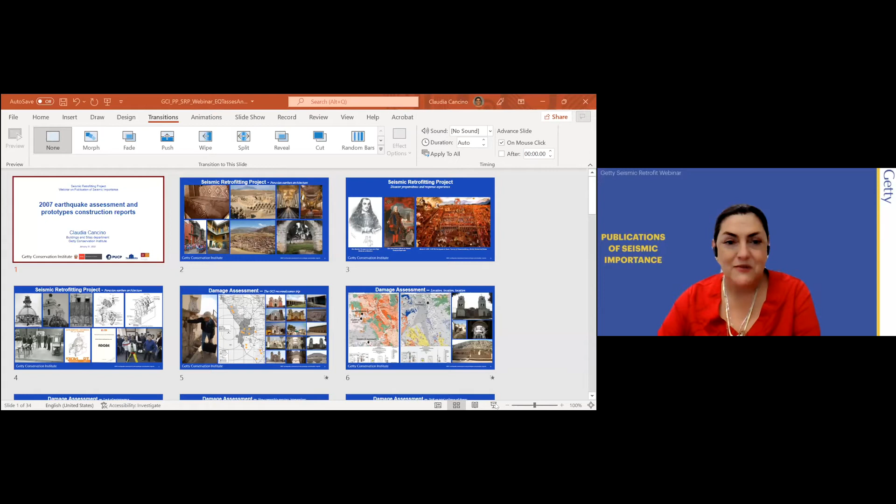Today, I am going to present the first 2 publications of the Seismic Retrofitting Project, the 2007 Earthquake Assessment Report, and the Prototype Construction reports. I also would like to acknowledge that apart from our wonderful partners, Ministerio de Cultura del Perú, Pontificia Universidad Católica del Perú, and TecMinho, the University of Bath and University College London collaborated with this project at the beginning in 2010 and 2012, respectively.

So you all have heard that I'm Peruvian, and probably you all know that Peru has a variety of earthen sites, starting from the pre-Hispanic period. And actually, in the last couple of years, researchers have discovered the oldest earthen architecture on the north coast of Peru, at the site of Los Morteros in the Chao Valley in La Libertad in Peru. The site was constructed with ancient earthen blocks carried from natural clay deposits by floods, probably caused by an early El Niño. And the bricks are dated around 3,000 years before our current era. So probably this is the oldest earthen architecture in the Americas.

But from there, Peru has developed amazing sites, starting with Huaca de la Luna and Huaca del Sol in Trujillo, as well as the site of Chan Chan. And then the use of this material didn't stop with the arrival of the Spaniards. The Spaniards actually adapted and improved the techniques to make them seismically resistant. And earthen architecture is something that is currently present in Peru and is used for the construction of modern houses. But I also would like to stop a little bit here in the history of Peruvian architecture to talk about these two very important fellows that you can see here on your slide.

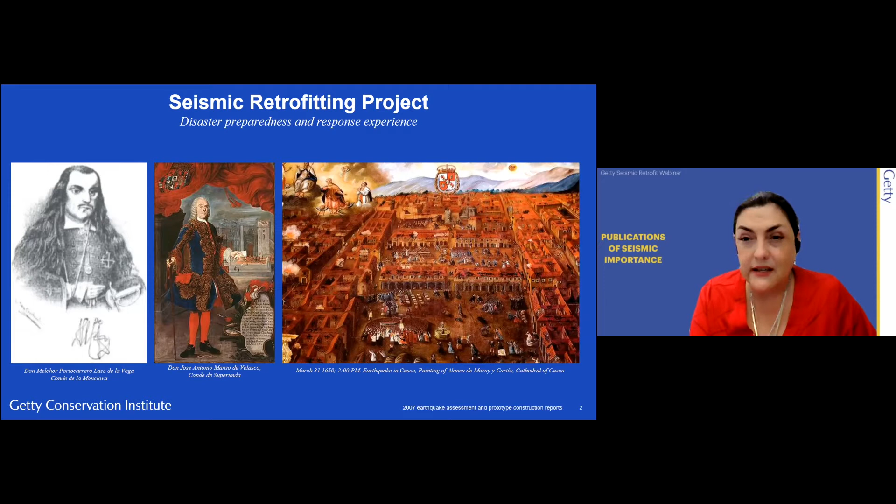So Peru is known not only for its rich and diverse earthen architecture, but also because of the evolution of the techniques to adapt to seismic events. This evolution during the Viceroyalty period didn't stop during the Republican period. And there were a lot of academics that actually study these techniques in schools of architecture and engineering. And particularly starting in the 70s, there were a group of engineers at Católica University, as well as the Universidad Nacional de Ingeniería, who actually started studying the use of earth as a building material.

So on August 15, 2007, around 6:40 p.m., a very strong earthquake occurred in Peru. The earthquake was described as having two strong motions and affected the sites of Lima, Ica, and Huancavelica, as well as parts of Ayacucho and Junín. Damages to vernacular architecture, concrete and masonry buildings were recorded there, as well as damages even in the Pan American Highway.

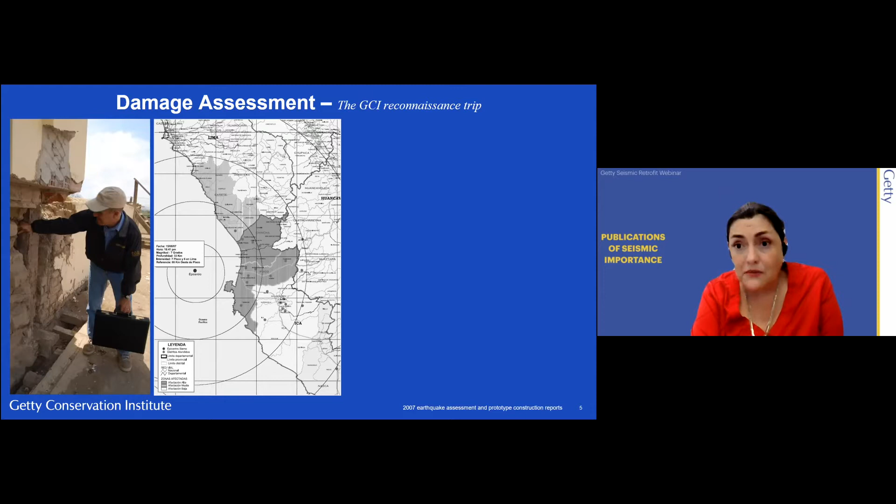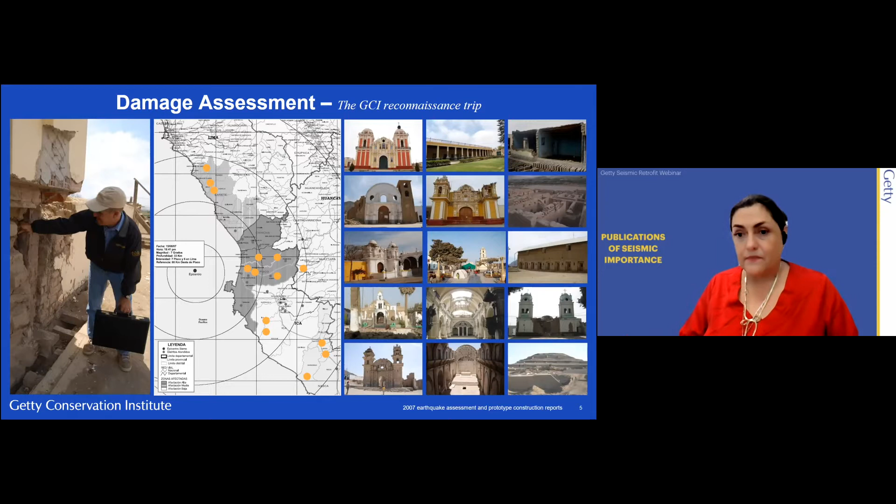Unfortunately, Peru also lost one of the most important buildings from the Viceroyalty period, that is the Church of La Compañía, that was built around 1650, and it was completely demolished a day after the earthquake. So when this happened, Getty was called by, at that time, the Instituto Nacional de Cultura del Perú to go to the site and evaluate the damage of some of the sites. And for us, it was actually an opportunity to understand why these buildings that over centuries have adapted and withstood earthquakes failed so terribly during this earthquake.

So after a visit that happened in November of 2007, composed of around 12 national and international experts, one of the conclusions was that location had a lot to do with how the buildings performed. So here we can see that, for example, the Church of Humay or the Church of Guadalupe are located over alluvial deposits that you can see here in gray, and those are not actually the best soils to withstand earthquakes. And similar happens with the Cathedral of Ica.

And just for your information, Tambo Colorado, an Inca site that has actually withstood a series of earthquakes, is located on a different type of soil. It's at the base of a rocky formation that you can see here in orange. So location had something to do with how the buildings performed.

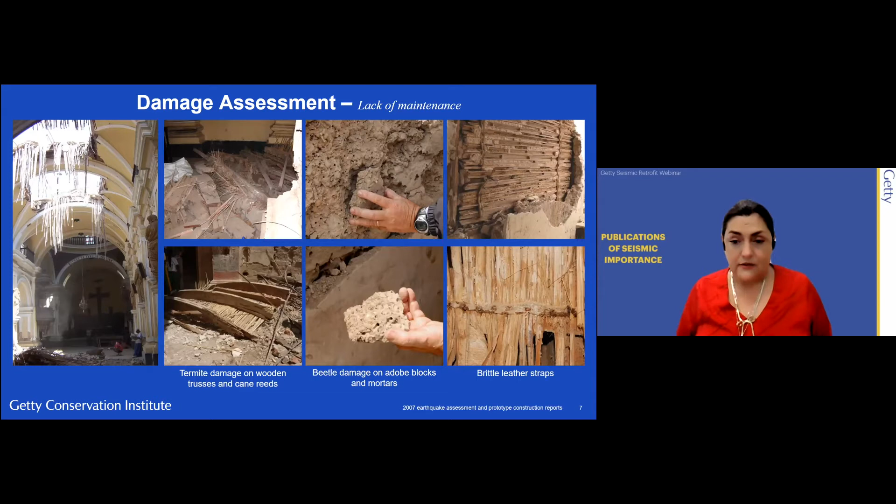Another conclusion was that for sure the buildings suffered from lack of maintenance. We were able to record termite damage on wooden trusses and cane reeds, particularly at the Cathedral of Ica, beetle damage on adobe blocks and mortars, as well as brittle leather straps, which actually connect the cane to the wooden structure and allow the mud plaster to be connected to the whole structure. So another conclusion from that visit was that there were a lot of non-compatible previous interventions.

The most common one is that the roofs of the churches, the vaults and the domes were actually in most of the cases covered with a layer of cement, probably to prevent rain entering the sites, and that actually increased the weight of the roof and had an impact on how these buildings behave during an earthquake.

In other cases, as you can see, they had interventions like these concrete porticos that were inserted into adobe walls. And of course, after the earthquake, the only thing that was standing was the concrete structure, and the historic adobe walls had failed due to the difference in pounding during the seismic event. So these types of interventions were the ones that created a lot of damage on the historic sites.

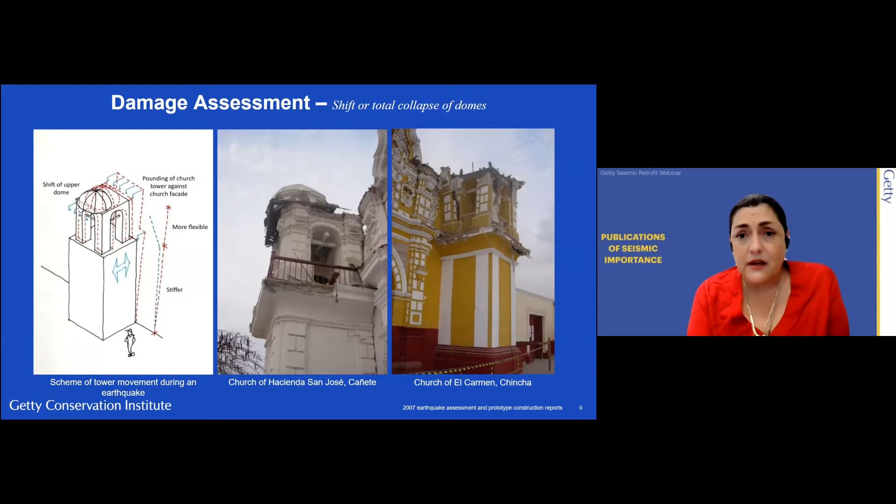We also tried to understand how certain elements behave during the earthquake. So we witnessed a shift or total collapse of domes. And that had to do with what we explained later, that the wooden connections were actually heavily deteriorated. That's the reason why a lot of these domes shift or collapse, as well as the vaults in many of these earthen sites. So it was a combination of the weight of the roof as well as the lack of functionality of the connections that created all this damage.

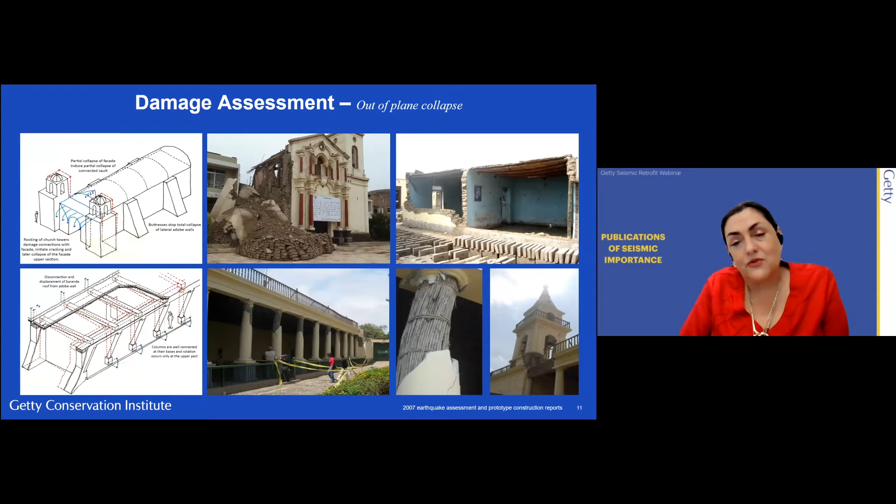We also witnessed a lot of out-of-plane collapse due to the lack of connections between the different structural elements, but we also witnessed a torsion effect here in one of these very interesting columns that you could see in one of the haciendas in the region. So all of this information was compiled thanks to some of the international experts that traveled with us. And this was the first publication from the seismic retrofitting project that you can now find in English and in Spanish at the Getty website.

So with this publication, we started the seismic retrofitting project that had the objective to design low-tech seismic retrofitting techniques using appropriate materials and local expertise for Peruvian historic buildings, prototypes that have the potential for wider implementation in the Americas. We wanted to test and model scientifically to demonstrate the validity of these techniques, obtain national recognition, develop a model implementation conservation project, and the final outcome, as Susan has mentioned, are the guidelines with an emphasis on maintenance programs.

So the first thing that we did was to define some sort of prototype that we could find in the region, and then from there, visit a series of sites and select the ones that were more appropriate. The 4 prototypes that we defined in the region were first, the typical residential house in the historic center that has the first floor made of adobe, and the second, and in some cases the third, made of quincha. The second typology was the typical ecclesiastical building from the coast that had thick adobe walls and vaults and domes made of quincha as the roof.

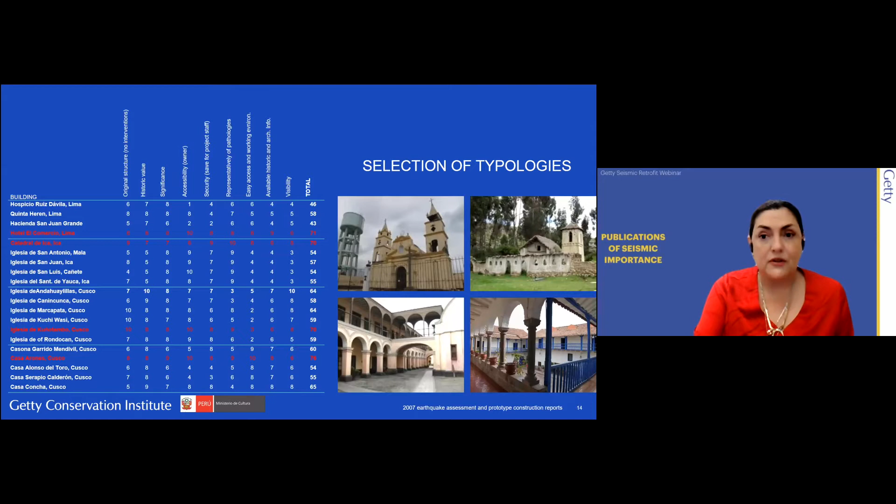So we visited a series of sites and we evaluated them according to historic value, significance, and whether they had interventions or not. And we came up with 4 buildings that became our building prototypes for further study. The first one, as a residential building from the coast, was Hotel Comercio in Lima, property of the Ministerio de Cultura del Perú. As an ecclesiastical building on the coast, we selected Ica Cathedral. As a residential building in the Andes, we selected Casa Arones. And as an ecclesiastical building in the Andes, we selected the Church of Santiago Apóstol de Kuñotambo.

So the Hotel Comercio is a building made of thick adobe walls on the first floor with some brick around the openings, and then quincha structure on the second and third floors. It has 2 patios, as any of the casonas that you can find in the historic center of Lima. We went through all the development of the architectural drawings, and we selected some areas for further exploration. We were also able to perform a structural assessment of the site, and also use the thermal camera to, for example, in this case, identify the wooden posts of the quincha elements.

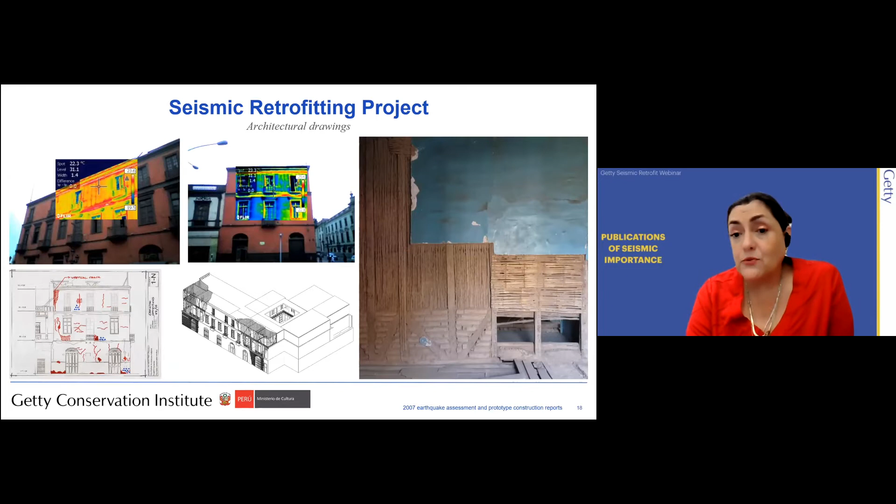All this research allowed us to create a series of architectural drawings and details that help us to understand how these buildings were put together and help the engineers to later design the proper testing and modeling.

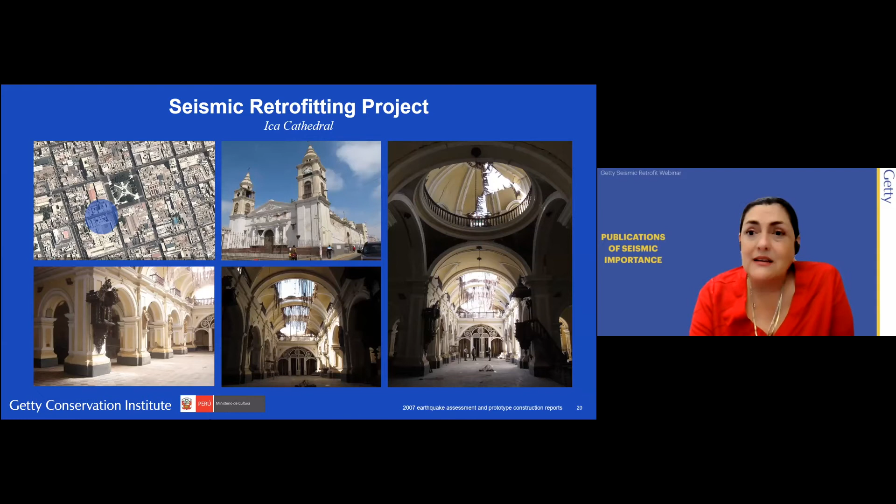Ica Cathedral was one of the sites that was heavily damaged by the earthquake. It's also located at the historic center of Ica, more or less in front of the main plaza. It unfortunately suffered from partial collapse of the vault. This photo of the dome was taken a few months after the earthquake, and you can see the dome is still in place, but there was another seismic event in 2009, and that was when the dome fully collapsed.

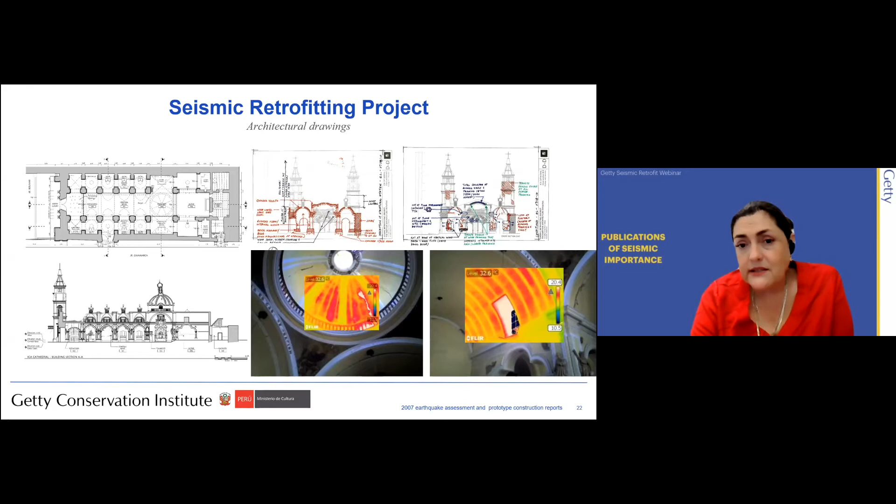So for the Ica Cathedral, we also did all the architectural drawings, the structural evaluation, and the proper prospection. We also used the thermal camera to understand the location of the wooden arches, as well as to try to understand the level of deterioration. It also allows us to understand how these amazing wooden structures were put together.

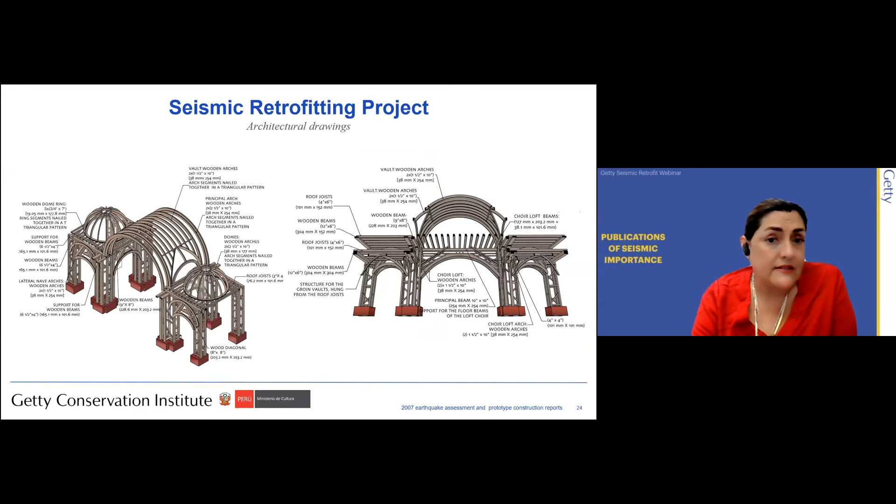We also discovered that Ica Cathedral has a very similar construction technique to the Cathedral of Lima, which makes it even more significant. So we were able to understand the details and the dimensions of this structure that later served for the analysis that the engineers are going to explain later.

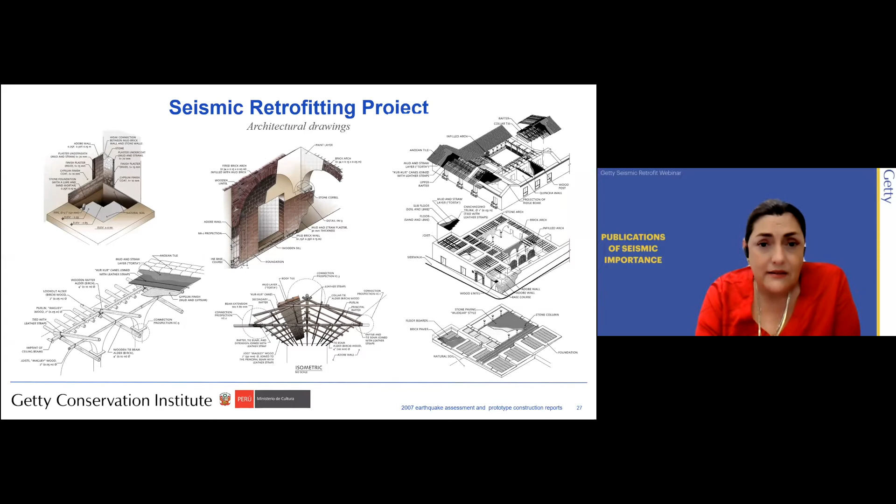We also selected Casa Arones at the historic center of Cusco. This is a typical house of the Andes, a two-story adobe building with a truss roof. We also did all the architectural drawings and the structural analysis of the house, and we were able to understand all the details of how these typical residential buildings were put together.

And last but not least, we also studied the Church of Kuñotambo, two hours southeast of the city of Cusco. It's a building from the 17th century, with thick adobe walls with buttresses, and has wall paintings from the same period. We did all the structural drawings and the details of this structure. And we particularly selected it because it has wall paintings.

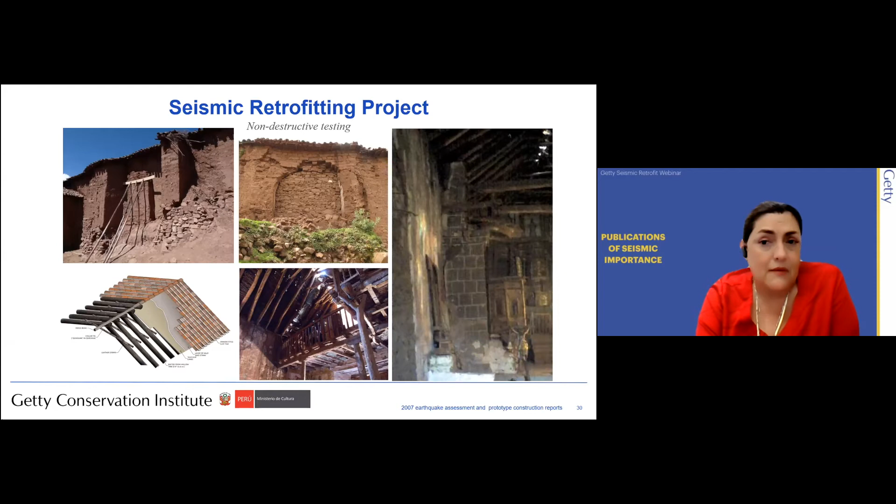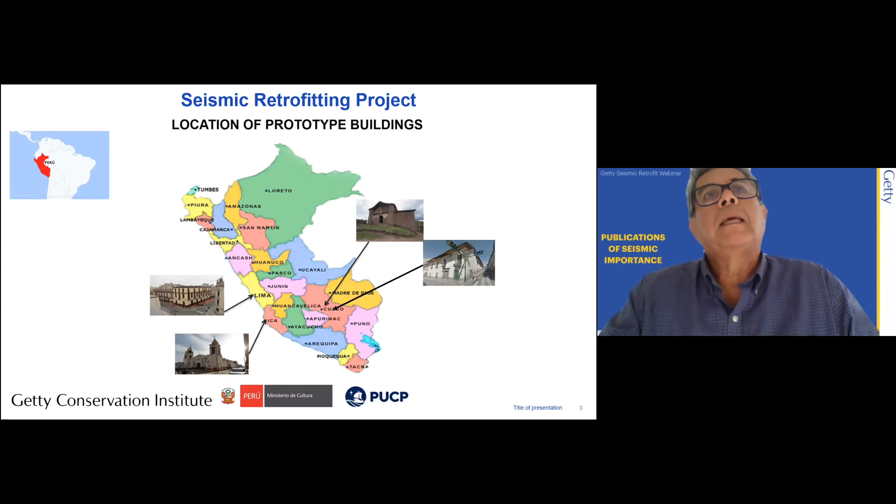The objective of the laboratory testing is basically to provide information for the analysis coming out of the meetings between the evaluations, the structural evaluation and the numerical analysis of the prototypes. We were in charge of doing the testing that came out of these meetings. There were a lot of questions about the properties of the historic materials of these prototypes, the structural behavior of quincha that was already mentioned, and the behavior of the traditional wood reinforcing techniques, like in the Ica Cathedral, for example, and whether the traditional retrofitting techniques that were applied back then in the constructions of the coastal area and the Andes.

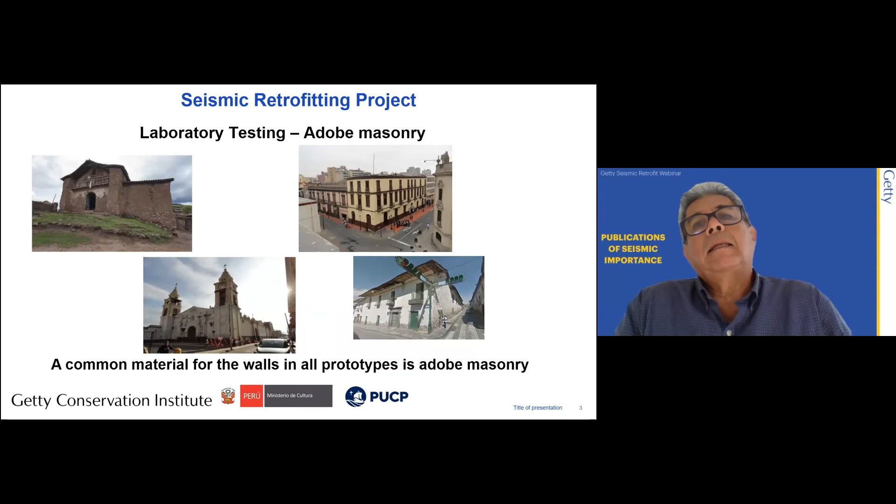So the first thing was that all of these prototypes, all these buildings have a common denominator: all the walls are made from adobe masonry. So we had to analyze all the materials that are composed of this historical component.

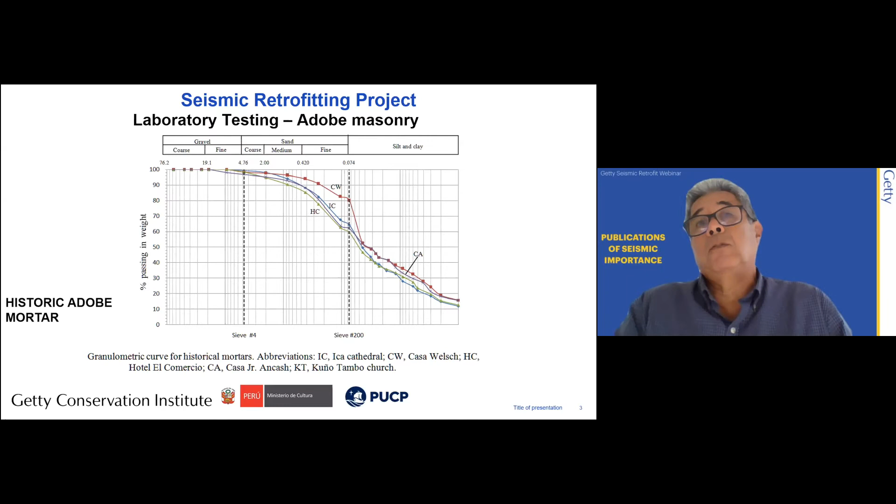What we were able to do is the seismic retrofitting project for all these prototype buildings. As you know, there are differences between the composition of the soil fabricated or built by different prototypes. However, when you see the mortar from these same buildings, the dispersion is not as large, it's much closer. This tells us something about this constructive process.

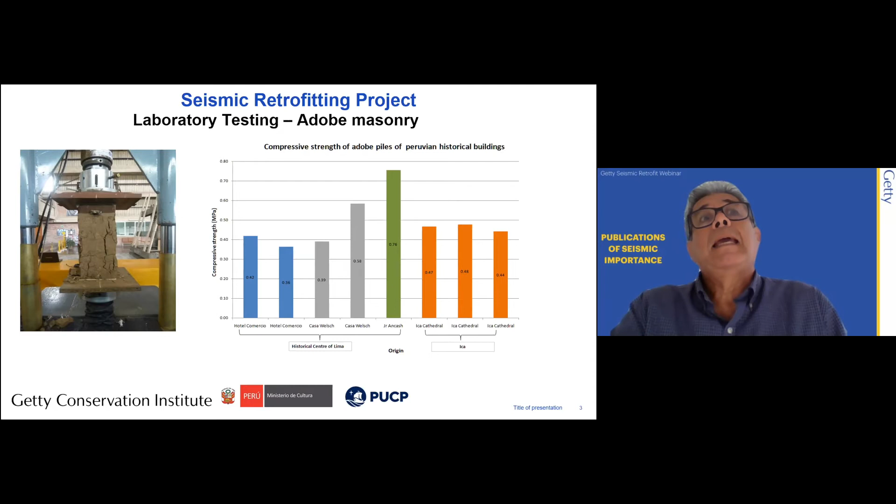So in all these prototypes, there wasn't just masonry walls of adobe, but it was also mixed with masonry from stone and brick. So what happens when you have a mix between one or the other? How would that work? But there is something that was common in all these cases.

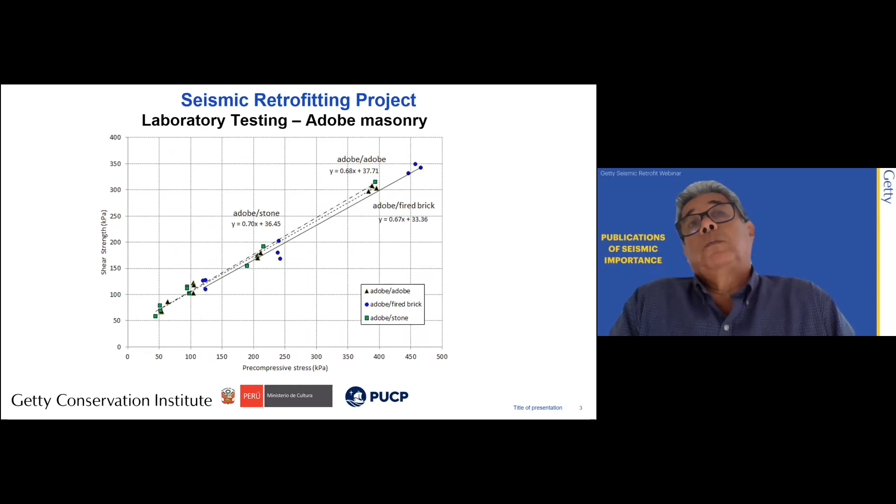The mortar was made of soil, and these compressions were made mixed with brick, but you have to understand this is all made with soil mortar. We were able to do this with adobe for the Cathedral. As you can see, there's not really a difference between the contemporary adobe, which has a bit more resistance, and the historical one. Nevertheless, when we mix the materials—adobe with stone, adobe with adobe, and fired brick—basically the results are the same, as you see in this graph.

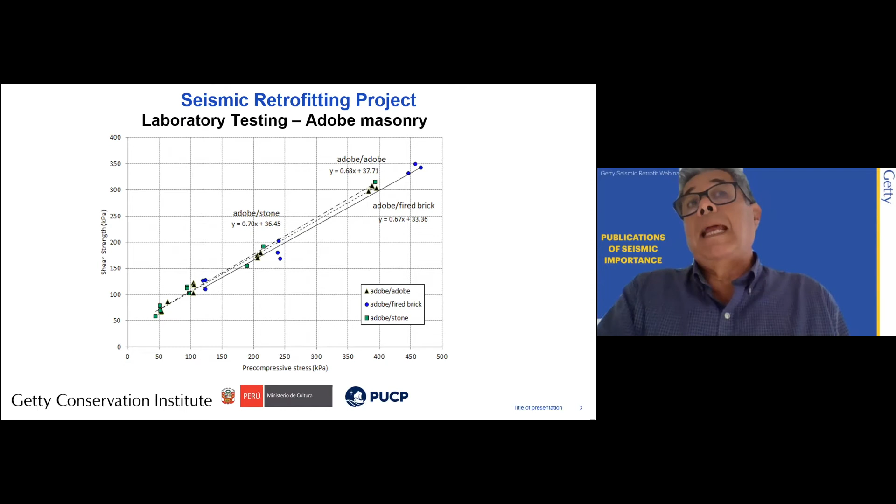Why? Because of the mortar. The mortar is a soil mortar in all the cases. And if you look at the friction, the internal friction angle, you don't really see any significant differences. So these are the conclusions I had already mentioned before.

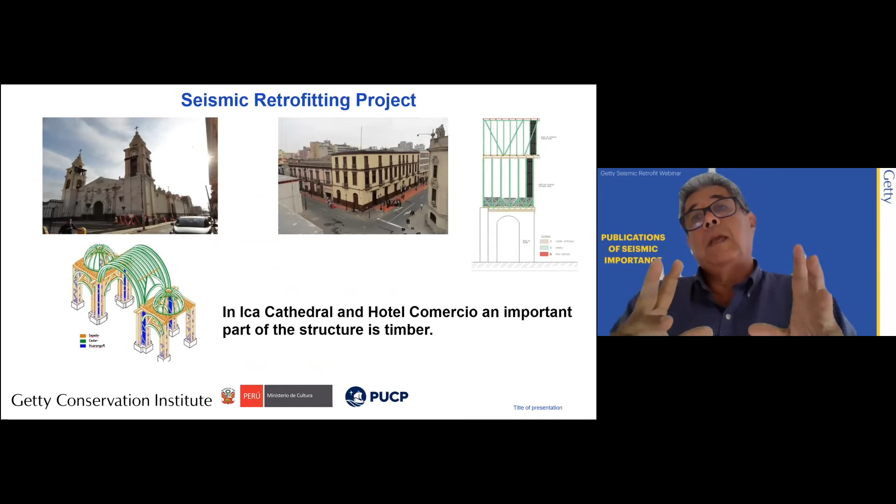In the Ica Cathedral and the Hotel Comercio, one of the important materials is timber. So we also had to analyze the timber material, but something particular in Peru: there is timber in the Amazonian parts, but not on the coast, and the timber from the highlands is different. There wasn't much timber available when these buildings were constructed.

So where does the timber come from? For all these historic buildings built in Lima, it came from Central America, by boat to the coasts of Peru.

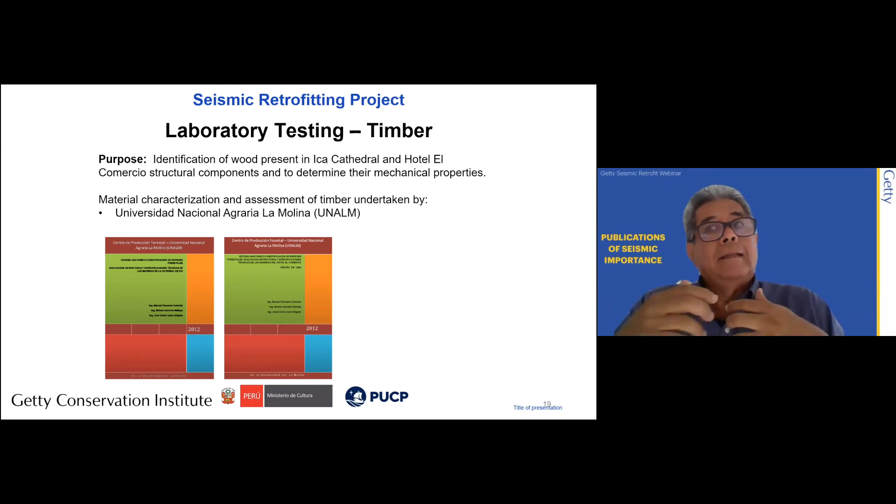And amazingly, it was a type of timber that they were assured comes from Africa. I don't know how that could have been the case, because we tried to look at historical information, but there was no historical information that convinced us that it could have come from Africa. So now we already know the values of the mechanical properties of all those types of timber.

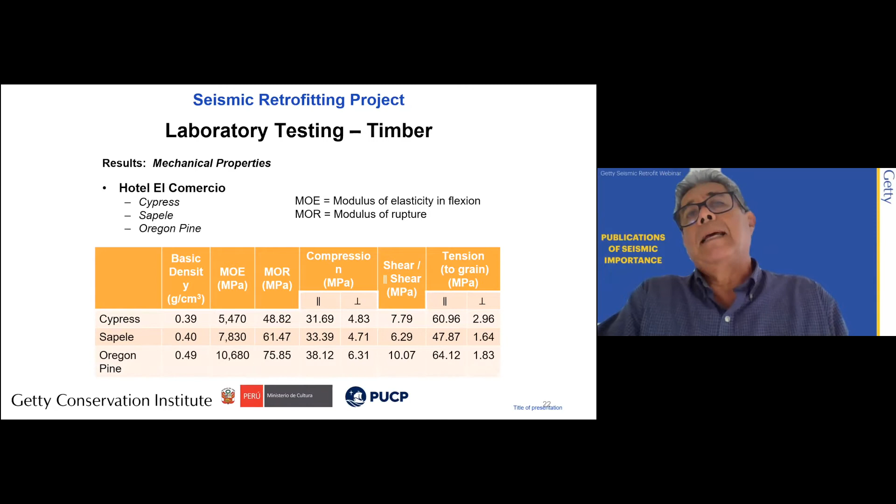That is to verify later on the numeric analysis that we had to do in this case. So in the case of the Hotel Comercio, we see the structural system of the quincha. And if we already know, and everybody accepts that the quincha is very flexible, very resistant seismically, there wasn't anything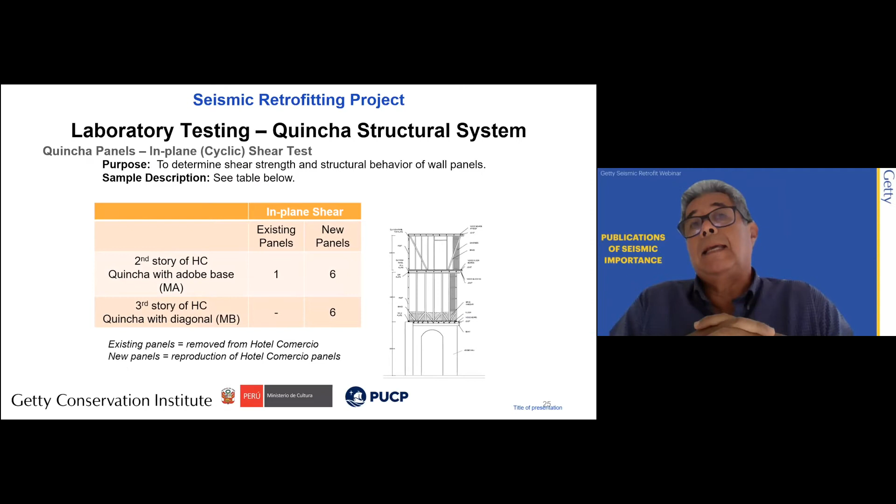numerical information that would corroborate this. So what we did was we had these tests in two different panels of quincha that would represent the panel of the second floor and third floor, right? The third story, as you could see to the right there. And it was reproduced exactly the same dimensions of the same timber and the same type of procedure throughout.

So these new panels were reproduced, and the difference between the second and the third has a diagonal beam, but the first one has an adobe base in the bottom. It was an adobe base for the second and a diagonal one for the third.

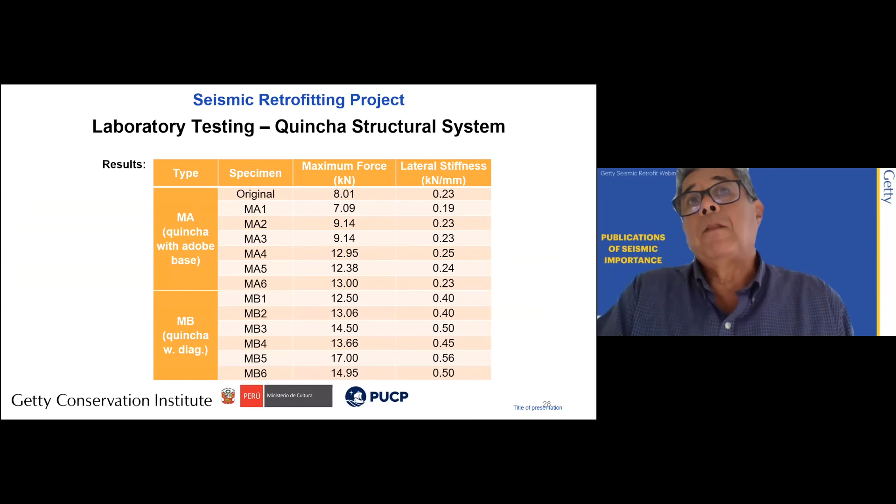And we were able to test with these vertical loads and without vertical loads. And what we could see here, in the case of the maximum force, the horizontal maximal force in both cases, it was like around 12, 13, 14 kilonewtons of maximum force. But the most important thing is not the resistance itself, but the capacity of deformation.

And what we can see is the capacity to resist vertical loads. It's very, very acceptable.

And these are the other panels that you could see, but this is a new type of timber. The timber is 200 years old or more. How could it be? And then after thinking about what we could make, this testing of the

existing quincha, we were able to take off the wall in an area where it had collapsed and rebuild it element by element in a structural lab.

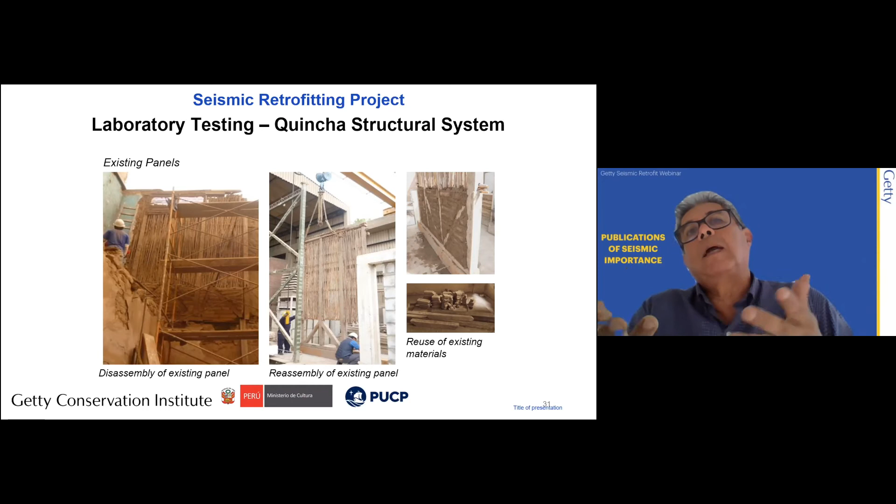So we did this, and we had this testing performed again with the same characteristics, in this case without the vertical load, because there was only one panel. And we found that the capacity of deformation was basically the same. So it had a great capacity without reducing its resistance of vertical loads, but obviously the maximum value

that was able to be reached was 10 kilonewtons compared to the 13 or 14 that were done in the other reports. But it was very, very acceptable for a quincha of over 200 years old.

So these are the conclusions, the same that we have been talking about. As far as the Ica Cathedral, the question that was brought up was that this had many connections in timber, like there are too many, all these parts connected with them. And the thing is, how do they behave?

Well, we picked 3 types of connections, as you could see in the graph to the right: a pin, a nailed one, and a mortise tenon. And we tested the connection with the pin. I said monotonic to see the maximum capacity of resistance.

In the case of the nailed one and the mortise tenon, this was done in a cyclical way. In the case of the mortise and tenon, it was done in 2 orthogonal directions, parallel to the beam and perpendicular to it, to see how rigid it was, because what we wanted to know was

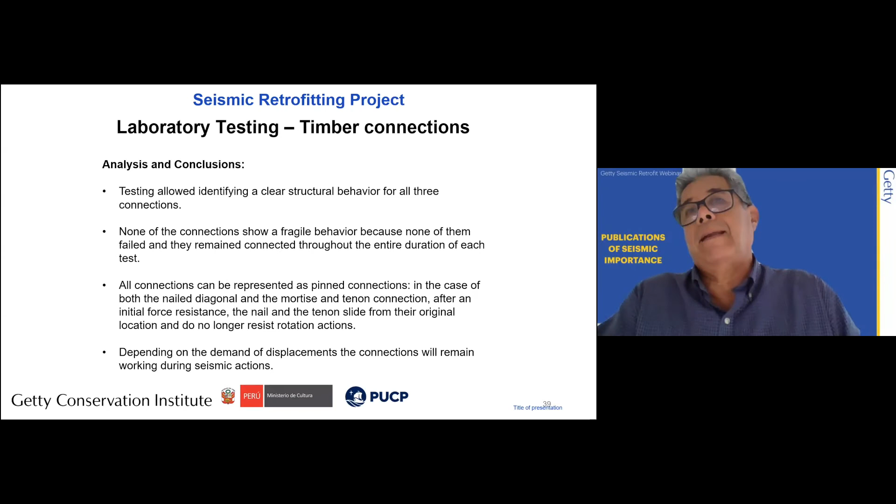What we saw is that the connections kept working in a unified manner. When we look at traditional techniques, we have different ways of connecting. If we connect two parallel walls, as you can see here, we would use beams, and this was used a lot in the churches in the Andes.

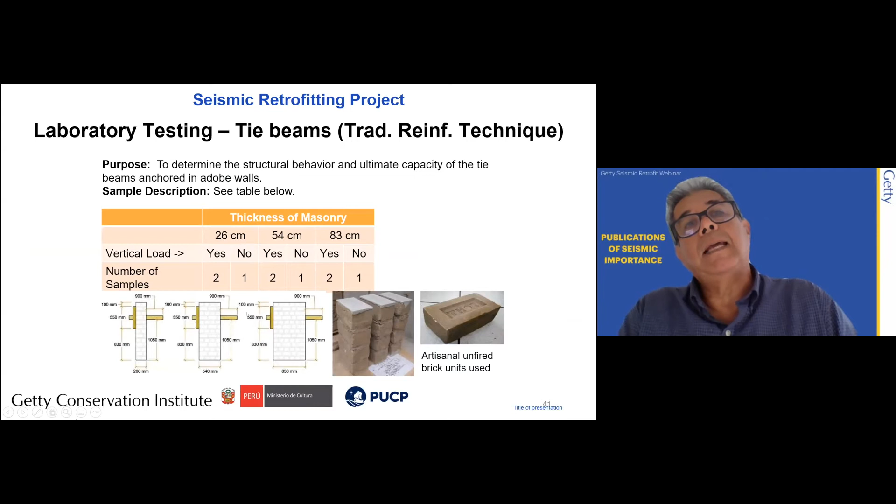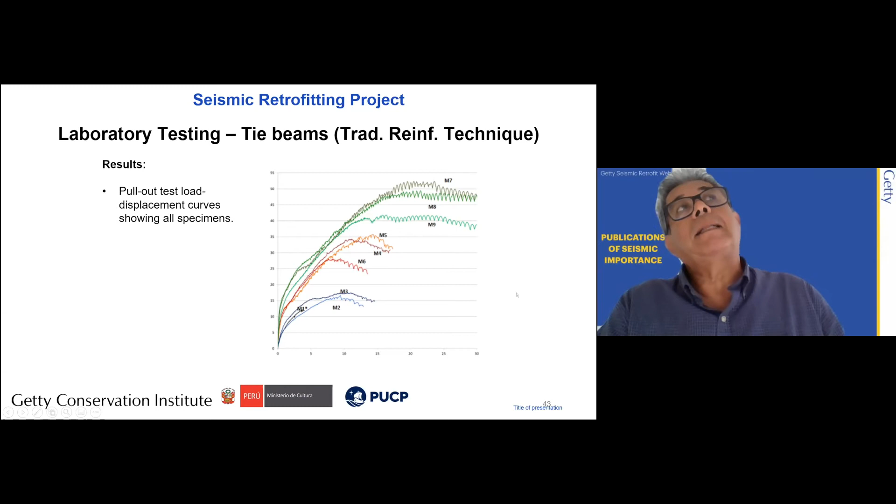We would use adobe walls of different thickness: 26, 54, and 83 centimeters. Here we would see a vertical load. So you can see here the thicker walls compared to the thinner walls. We see that this increases the resistance.

So more or less a 20% increase, the same as here. When we look at the thinner walls, it didn't work because the walls were too thin and didn't work. Another important aspect is that you can calculate more or less what the extraction strength is, knowing the surface and knowing the resistance.

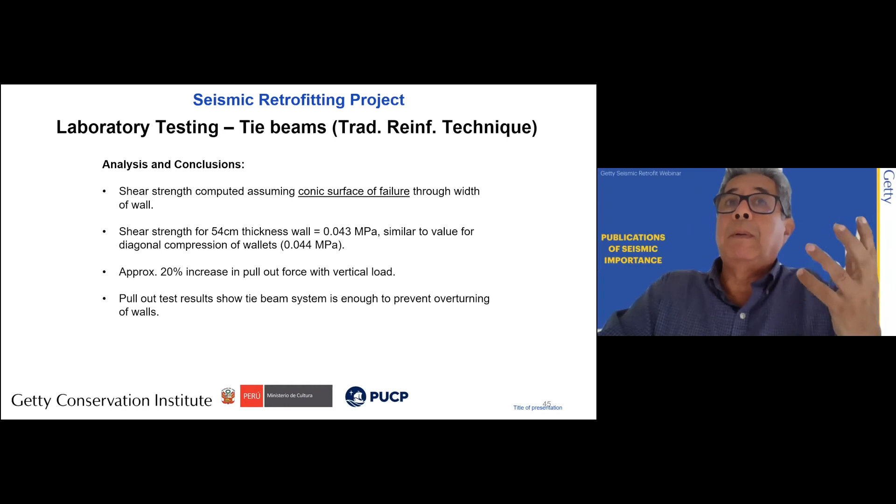So since we know more or less the resistance, with this study we can see more or less the maximum strength.

The other traditional technique that has been used a lot in constructions in the mountains and also in some coastal structures is what they call corner keys. You can see it in some of the homes in Cusco. The objective of these corner keys is to connect two walls to be able to maintain this connection during an earthquake.

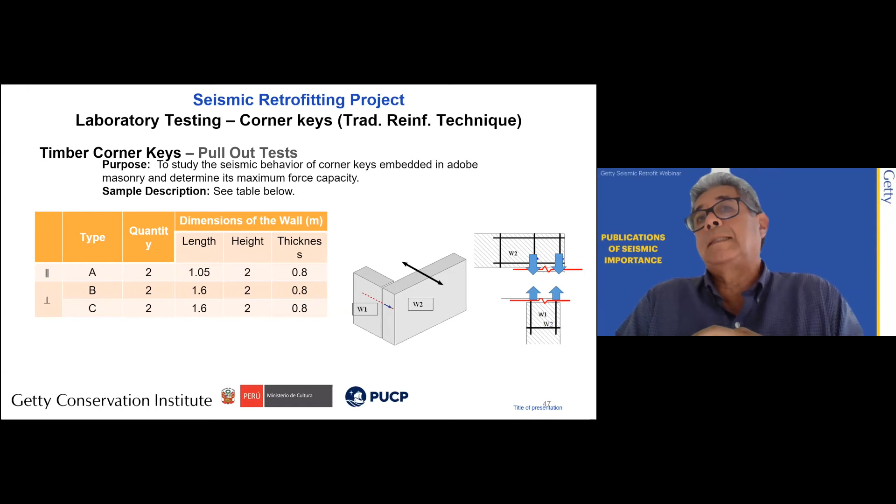This study was done taking into consideration, first of all, separating the corners into two parts, to see which one of the walls was giving problems. We wanted to see these corner keys, and this is how we were able to do this diagram on the right-hand side. And then we did it in the lab.

We did it in a type A and type B assembly, and type C is a variation of type B. Here we put some wooden keys to have more resistance if the key is extracted.

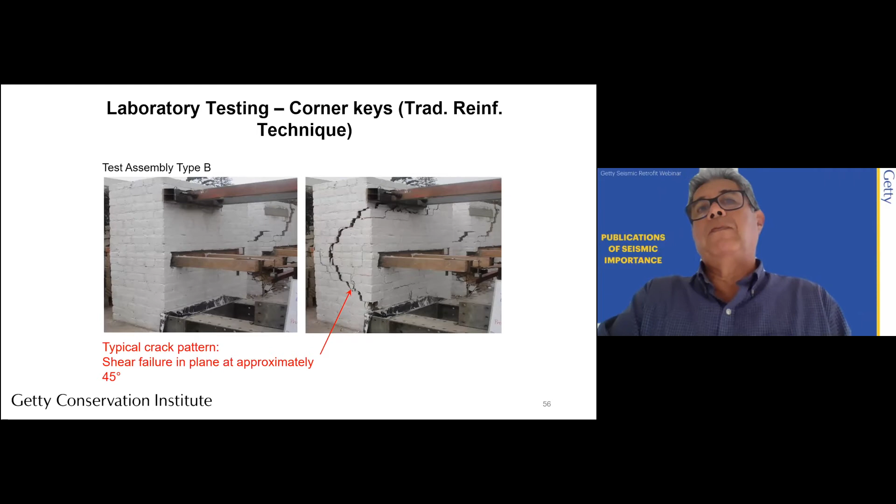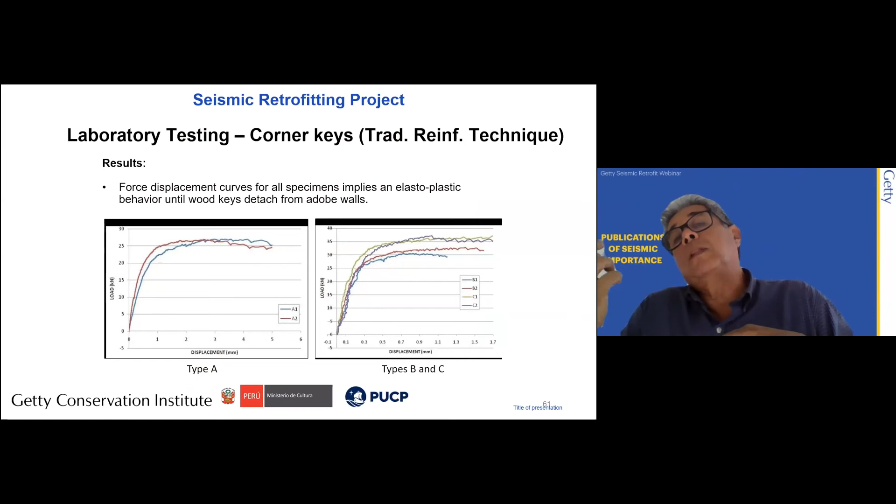We can see here that in the case of assembly A, it resists about 25 kilonewtons, and it's a uniform behavior. And in types B and C, it resists about 35. It's a small increase.

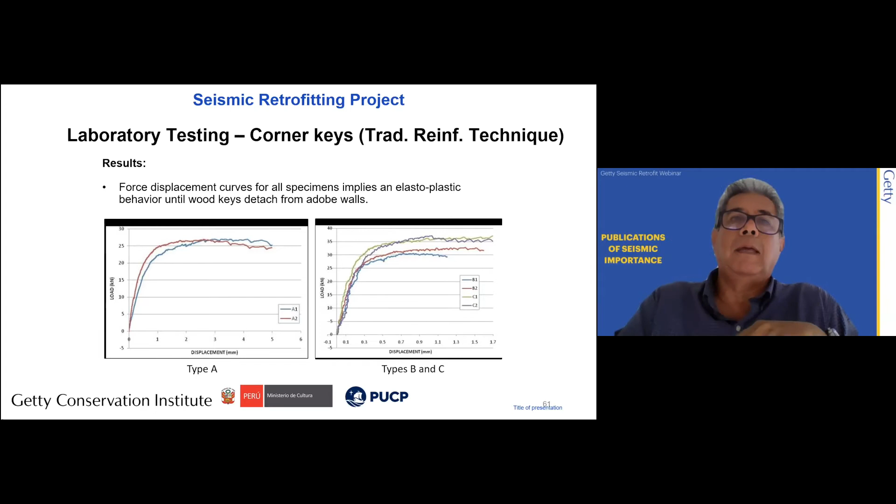And clearly what you can see, what is closest to type A, it has a way of behaving that's a lot more predictable. And the conclusions are the ones here: that type A, on section W1, if the demand is enough, is able to separate both walls.

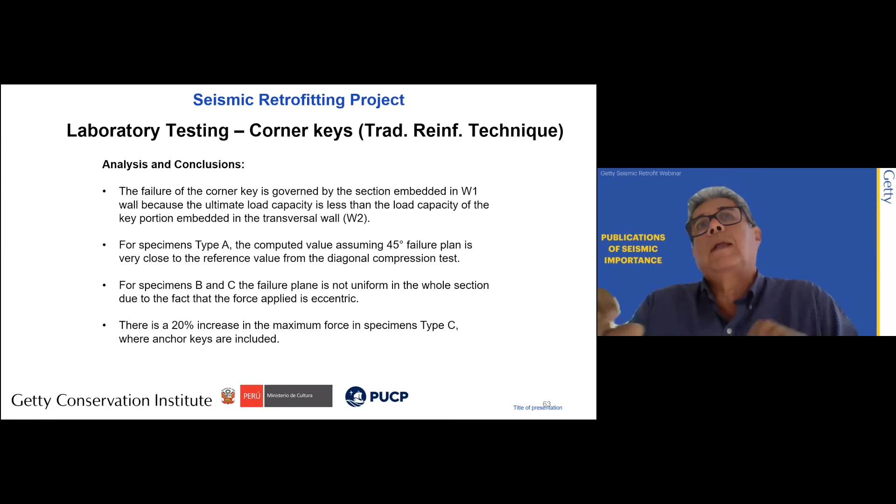So the general conclusions that you can see here is that all this information is a lot of information that was generated with these different studies. The idea of this presentation is just to encourage you to look at all the information in this publication, and that you are able to look at the numbers in more detail, because it can be useful for structural interventions for conservation in these type of constructions.

When we look at the traditional structures, we can see that they are effective to maintain connections between different walls, but also to maintain the behavior of these structures. These corner keys are useful.

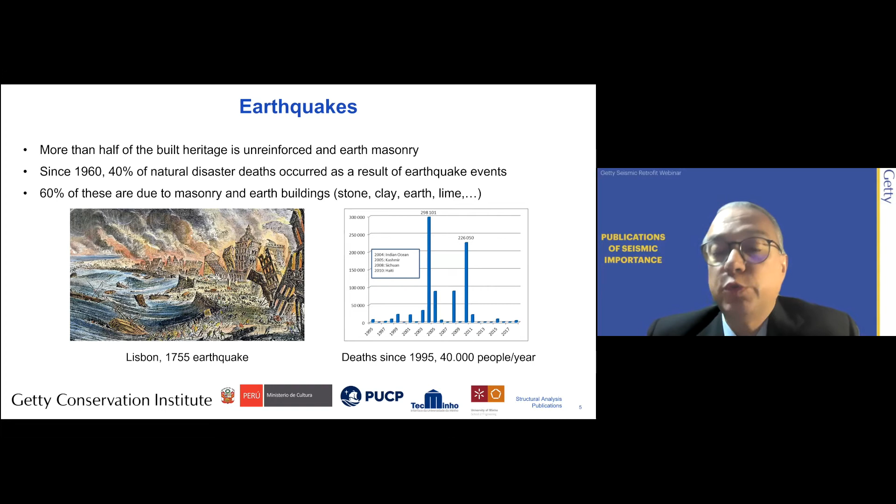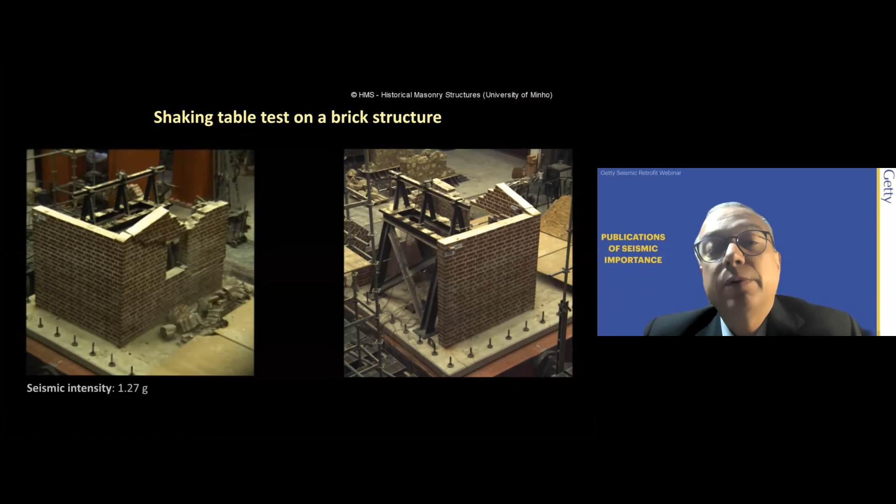And the reason for this, I'll show you a couple of videos, is that existing buildings, here you see a building made of clay brick, which is basically 2 retaining walls and 1 facade. It is built on top of a moving table that replicates an earthquake. And as you can see, the failure was extremely fragile. And so basically, you can see that the top part is going to fail as a sort of V shape, the tympanum or the gable.

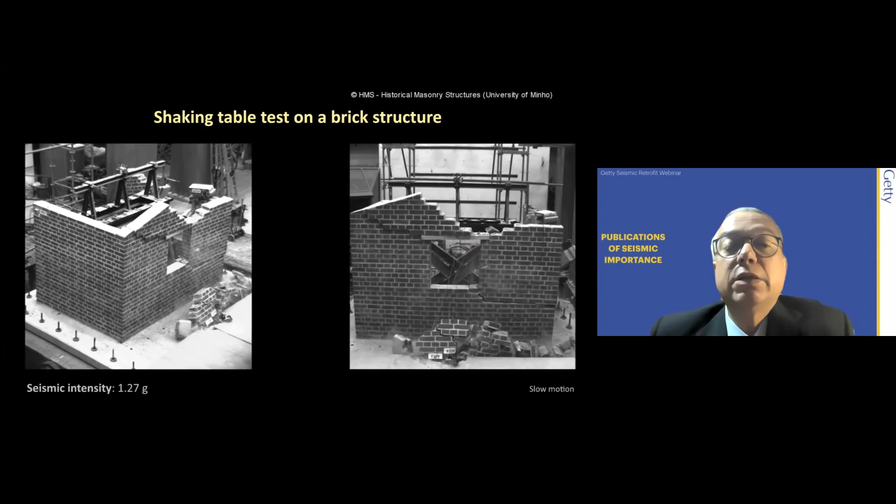And initially, almost the entire part of the building collapses together with the back wall, which has an opening. And the opening is also weakening the wall. But not the whole gable collapses, only a part. Then subsequently, as the earthquake progresses in time, another part collapses, and you end up with this pier, which with a little bit more of energy would also collapse. And so existing buildings are normally made with materials that are relatively fragile. This is the case of earthen construction. They are quite heavy, and they are also inadequately connected.

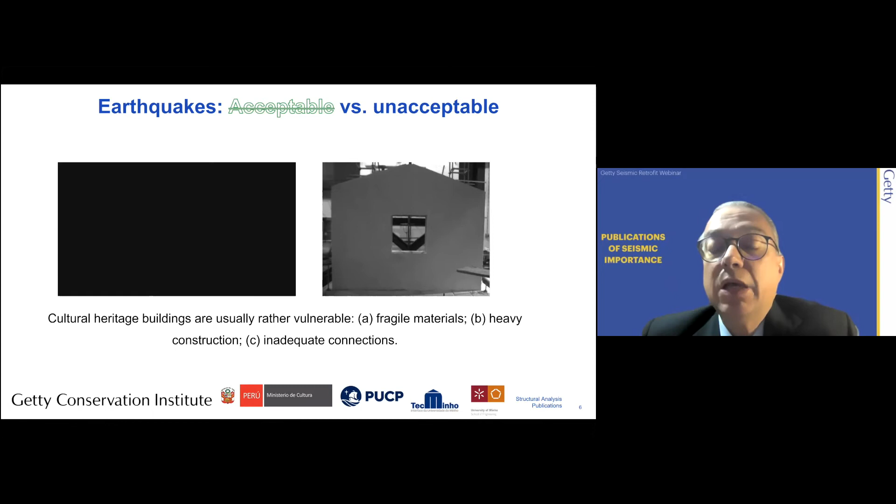And this is a similar building, which is subjected to a large earthquake. Again, the earthquake is towards the screen, and as you can see, we have nothing. And so an earthquake will typically kill the people inside and kill the people outside, or people trying to exit the building. In any case, these buildings can be relatively easily repaired.

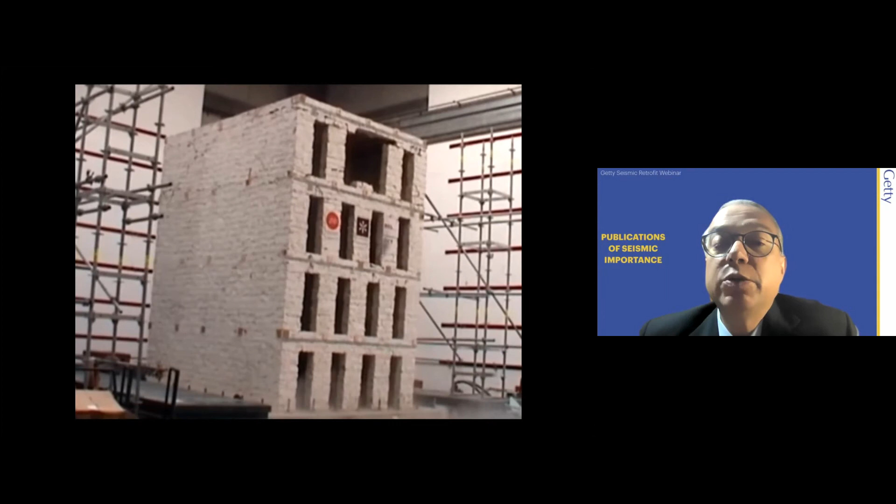And as you can see here, this is a repaired building, which is also masonry. In this case, it's stone masonry. And basically, the floors have been connected to the walls by steel ties. And this provided this box behavior, this integral behavior that also Professor Torrealba was speaking about.

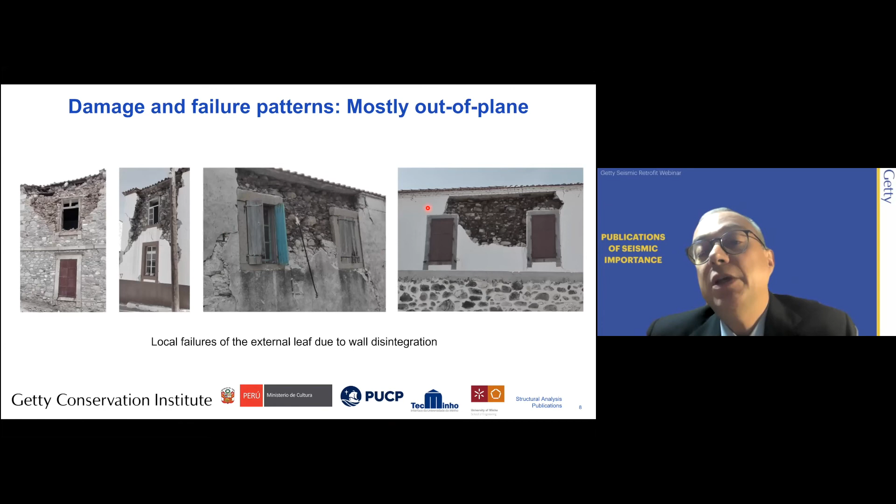And so most existing buildings collapse in a very local way. In a lot of cases, the material is of very poor quality, as you can see also here. And as a consequence, you lose part of the material, but collapses are mostly local. You can see here collapses of gables, collapses of corners, collapses of parts of buildings which are improperly connected, and collapses of facades. So most of these buildings collapse out of plane, and they are quite destructive with local failure.

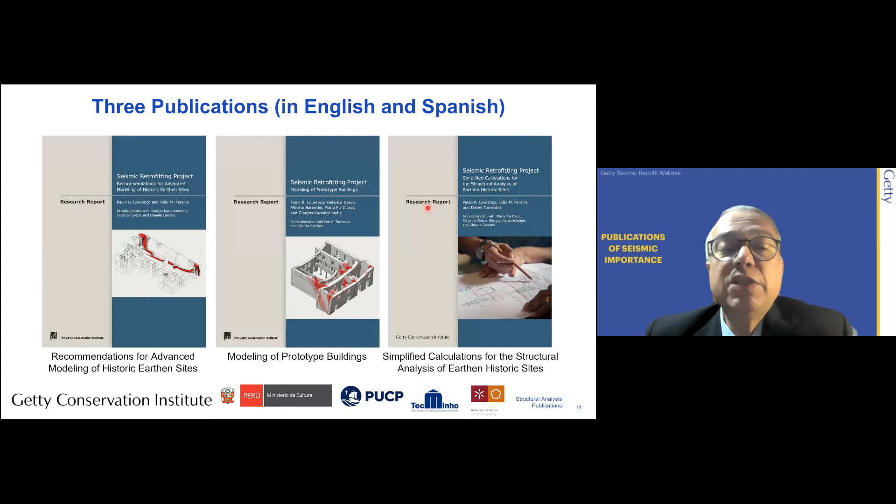And so typically, as it was done in the church already shown in Peru, the objective is to avoid disintegration and to ensure connections. And now these three publications try to address this. And so in the first publication, basically, the recommendations are for advanced modeling, I would say for experienced users, advanced users of sophisticated codes, mostly on the nonlinear range.

So the most used approach to model these complex buildings is the finite element method. And basically we discuss the methods, we provide some guidance, we provide some recommended properties, and we provide two application examples. One is a test carried out at PUCP in Peru, and the other one is one of the case studies.

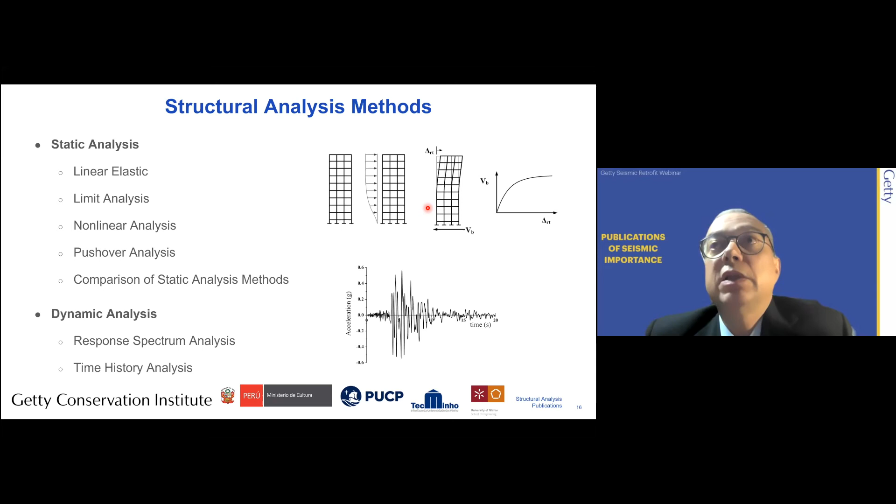And so basically what is done in this first guideline or report is to discuss the possibility of analysis, both applying the earthquake in a static way, let's say forces which do not vary in time, or apply in a dynamic way. There is a discussion on difficulties or problems in using this type of codes. Things like what are good representations of elements, which are bad, where do we have to have a better representation in the model, or we can have a less detailed representation.

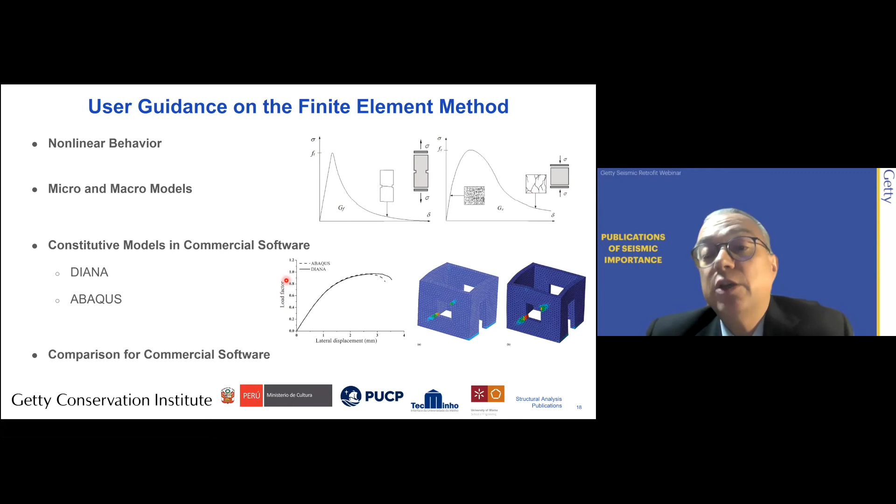Subsequently, there is a discussion on the properties that need to be used and the material models. Two well-known softwares are presented and discussed together with the material models that they use. They are compared, and you can see that an advanced user, by using different softwares, should get comparable results. And then there is a discussion on the properties that can be used.

And so different codes are used, are shown: examples from the New Zealand code, examples from the Italian code, the American code. Also, these examples consider masonry, both brick and stone, because normally masonry is also present in earthen construction as a base, as a plinth, or as a pillar, as a column, but also recommended properties for earthen structures are given.

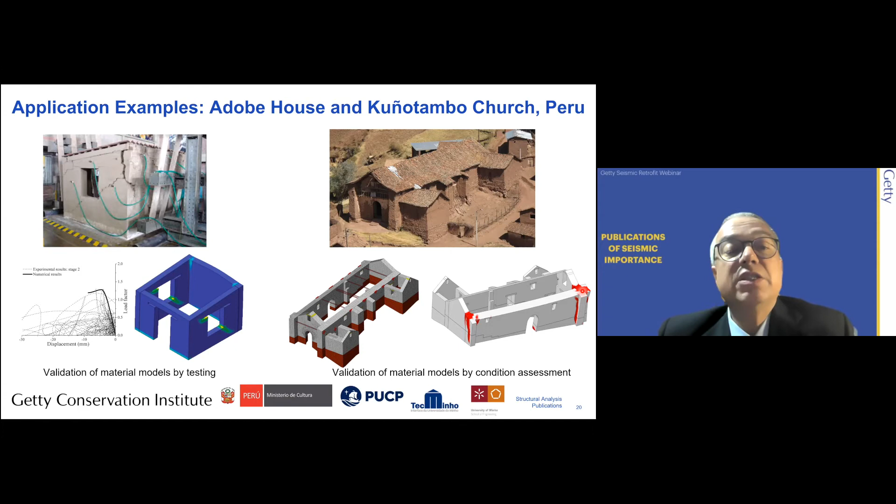This clearly indicates that the building collapsed with a local damage. In this case, it's only one of the facades. And by looking at the damage that we have in the building and the cracks that we find in our models, it also provides some validation for the simulation.

The second report which is given is on modeling the 4 case studies. And so basically you'll find a brief description of the case studies, a discussion on the modeling. Then 2 of the case studies are discussed both in the unstrengthened and the strengthened configuration. The Church of Santiago Apóstol de Kuñotambo has been already strengthened. The Ica Cathedral will be strengthened, hopefully in the very near future. And then 2 of the case studies have not yet been strengthened, which are Casa Arones and Hotel Comercio.

And so basically what is shown for the 4 case studies, and only 1 is shown here, is the performance of the building without strengthening. And here you can see again in red what happens in case of an earthquake.

And so these are the cracks that, if the earthquake is sufficiently strong, will develop in the building, which in this case will mean this facade will collapse to the back, this facade will collapse to the front, together with also here the presbytery, and here you can see the sacristy and the facade of the wall, or the collapse of the side walls.

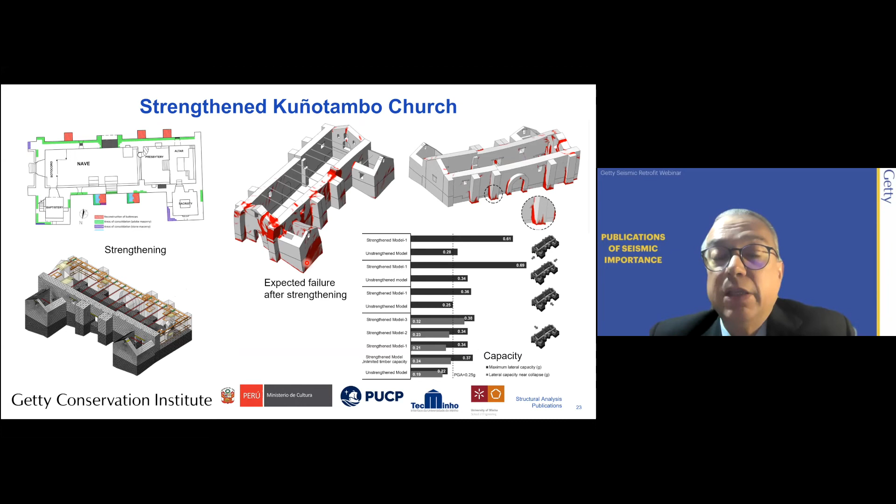So what was shown was that by applying strengthening to the model, it was possible to reach a capacity in line with what is, let's say, recommended or required by the Peruvian code for design of structures.

Then the final report is a report on simplified calculations. This report should be of use, I would say, for technical architects, for structural engineers with an education of 5 years. And basically, different approaches are provided. They are all very different and they try to address different problems. And so again, there is a bit of discussion on material properties. Then there is a discussion of a simple method based on the blueprint of the building, or the plan of the building.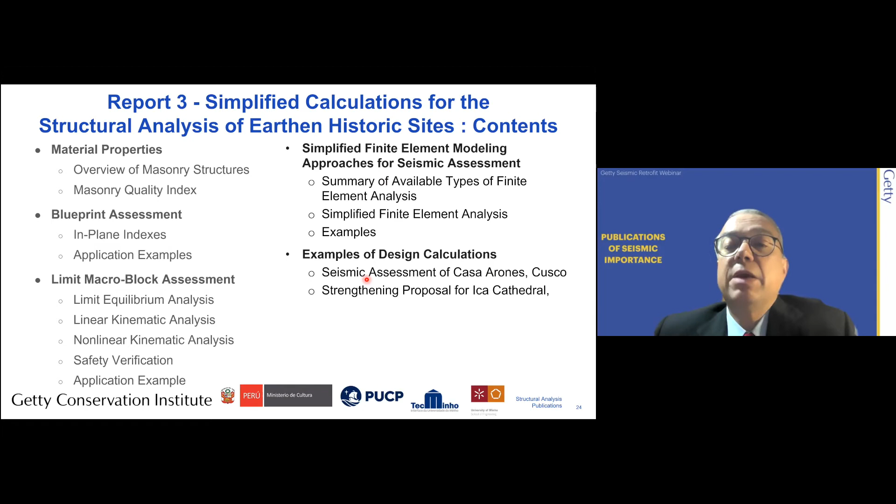Then another method that is provided is the modern way of assessment and designing strengthening in most of these types of structures, which is based on the failure modes observed and macro blocks. Some discussion of the simplified use of finite element modeling, and some examples of design calculations. And so basically, again, a discussion on properties is given. So for different types of materials, what are the properties we can expect? These are coming from databases, mostly in Europe.

In fact, an important aspect when we discuss strengthening or condition is what happens if the masonry is of better quality, or the stone is of better quality, or the earth is of better quality. And so there are factors that multiply the properties that try to consider the condition of the material by observation. And there are also factors that affect the material properties according to the type of strengthening that we can apply to the buildings.

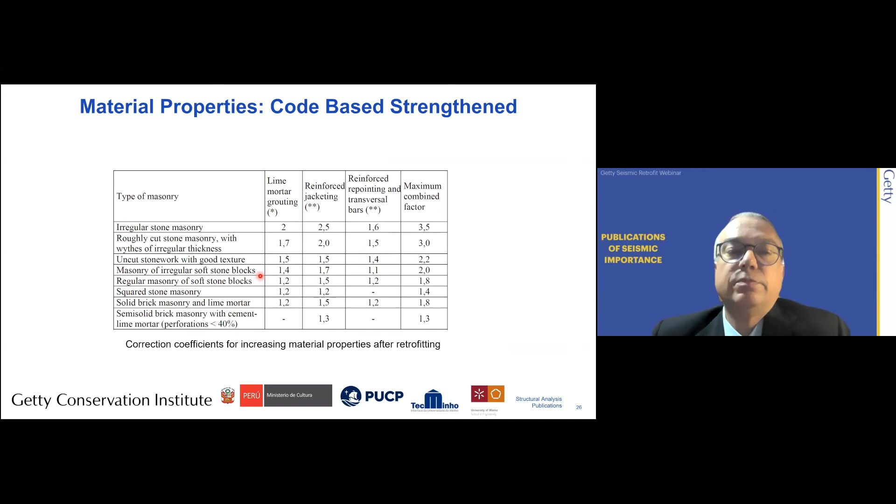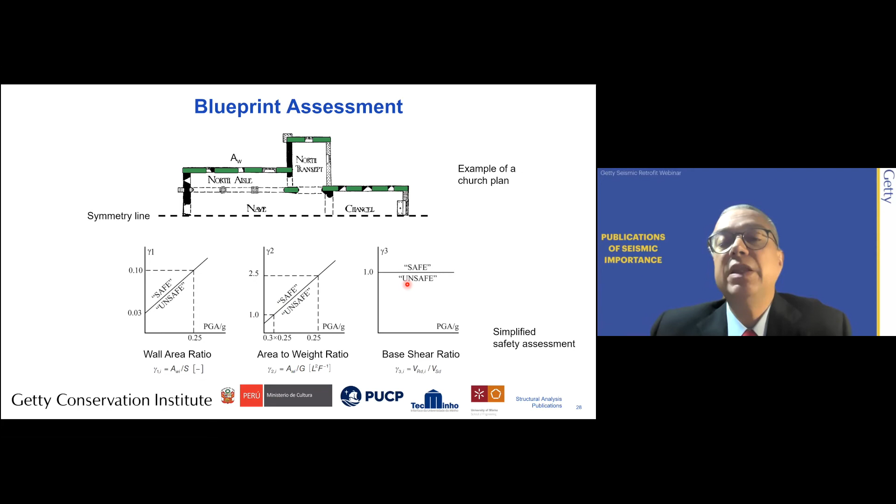You can see an example of what happens, for example, for a church, typically in the longitudinal and transversal direction. The transversal direction is normally the weakest, and you can see that more buildings fail when we apply this to many buildings. This does not mean that the buildings are unsafe. It means we have to study better.

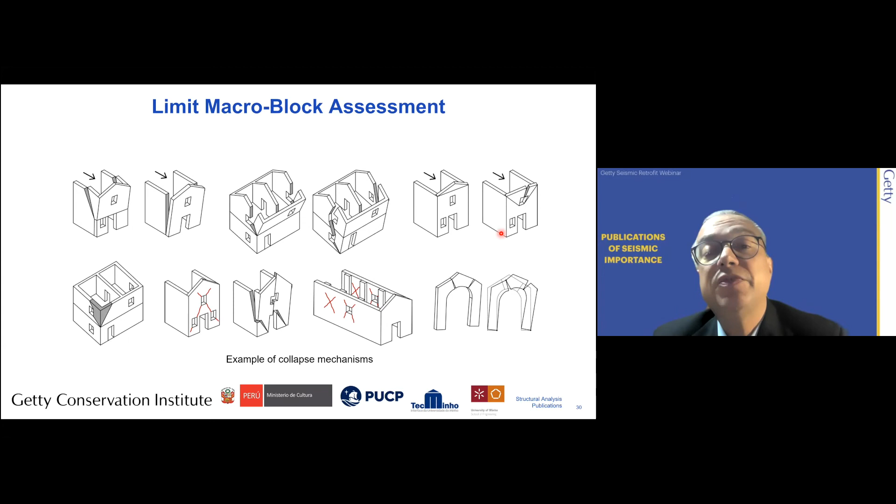Second method that is shown is this method of macro block limit analysis or assessment, which is based on observation on how these buildings fail when there is an earthquake by local out-of-plane failures. So basically what we try to do is we look at the failure. It could be in plane, most of the cases out of plane. We define a mechanism and we analyze this mechanism in a simple way. So if this is my mechanism, I can assume it is equivalent to, let's say, a single block.

We can see that this single block, as it starts to rotate, this horizontal force is lower because this height increases and this height decreases. So the weight is stabilizing, the earthquake is destabilizing. If the block rotates, there is a lower force. And if the block rotates up to the center of gravity being aligned with the rotation axis, then this force has to be zero, because the weight produces no stabilizing effect. And so this provides this law that you can see here.

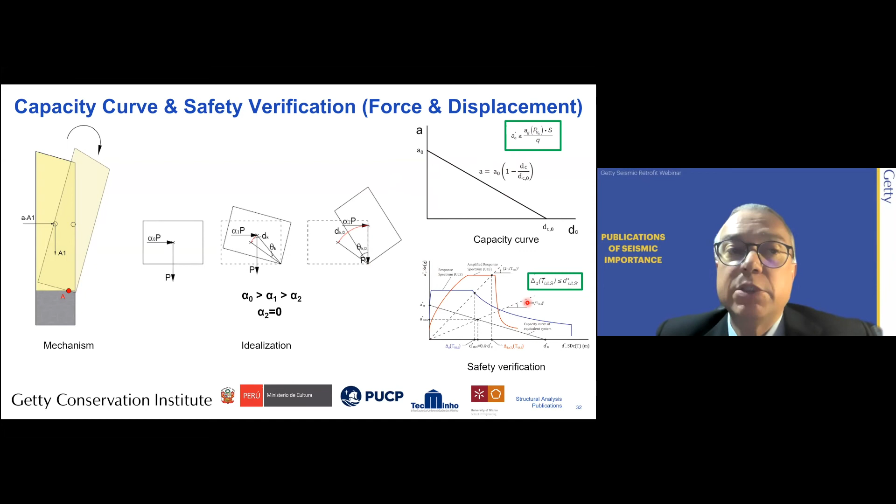And we are able to assess the safety of the buildings in terms of this capacity law, in terms of forces. We can convert this law to a single degree of freedom by applying some factors and represent this in terms of dynamics, and then we make the safety assessment in terms of displacements. This is also given in the report, and it is applied for the Church of Kuñotambo by considering the original configuration here and different studies using 2 buttresses, 3 buttresses, and 4 buttresses to see when it is safe. And here it is not safe, and here it becomes safe.

A very interesting example, which is shown also in the report, is the need of connecting. And so if I have the original wall and I make a buttress and I do not correctly connect, like it was done in Kuñotambo, then these 2 elements separate. And so this is safe, this is totally unsafe. And it is also shown in the report that it is unsafe. This is an example of a church that was strengthened in Peru incorrectly, without connecting properly the buttress to the wall, and the result is separation and a bad response.

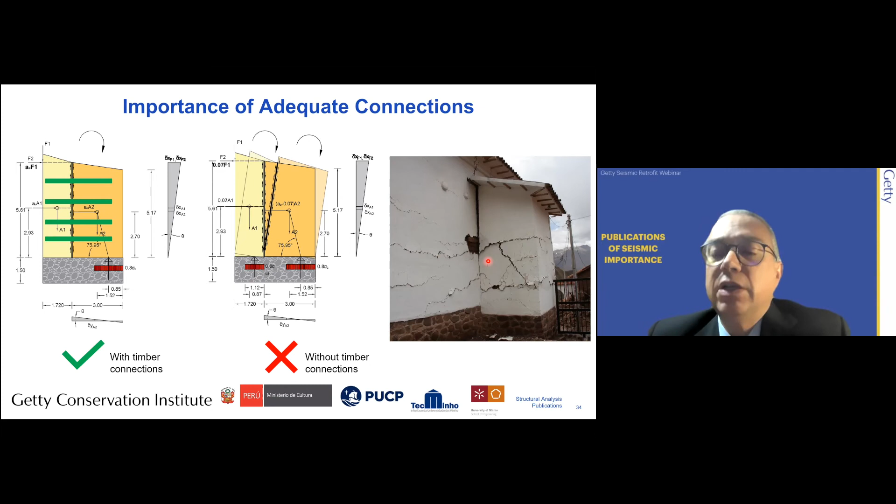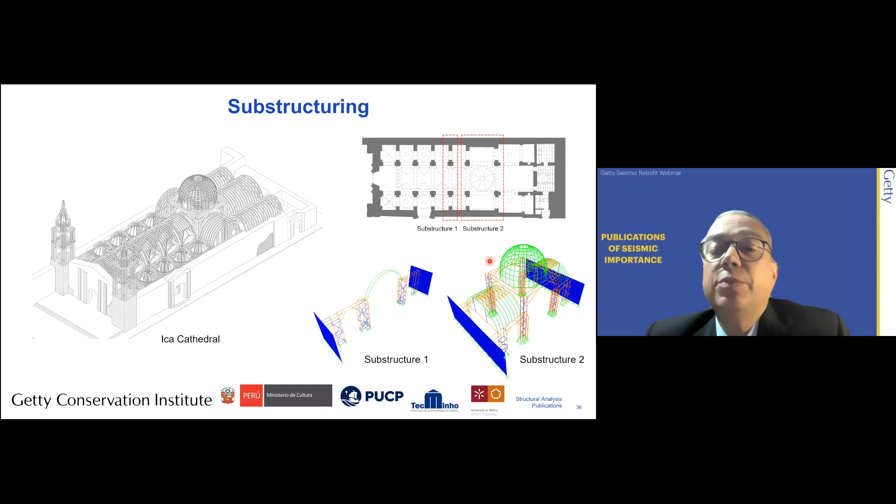There's also a discussion on simplified finite element approaches by using linear analysis, linear elasticity. What can we get from this? What can we expect from simple models, and how to apply and do some substructures of a complex structure to get information and to make a decision on strengthening. Then there are 2 examples of calculations, which are the final examples of this report.

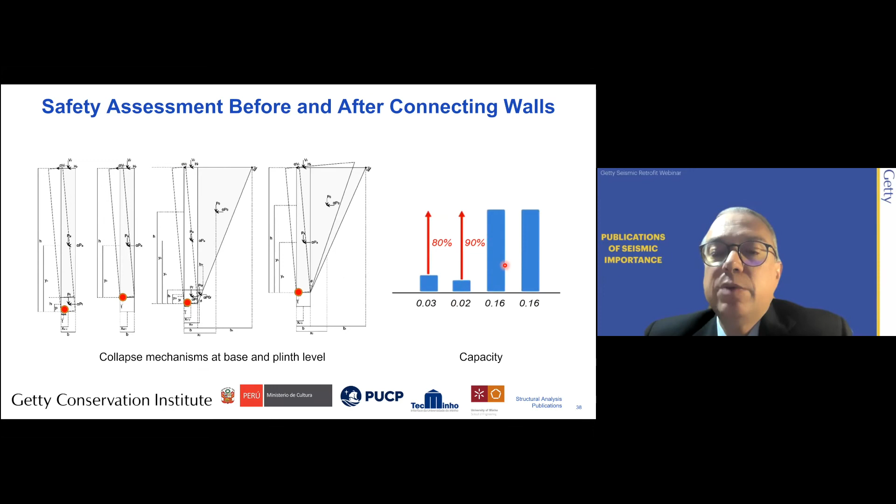One example is the discussion of possible connections, for example, in an adobe house, by just connecting the walls, by connecting the roof, by connecting the floor, or by connecting everything. And examples of calculations of the collapse mechanisms and the safety you can see here. For example, this adobe house, if the connections between the transversal and longitudinal walls do not exist or are weak, we have a disaster response. And so you can see the capacity is very low. If I connect properly the walls by using corner keys or ties, the capacity is multiplied by 5 or 6. So this extremely simple action in the building provides a huge difference in response.

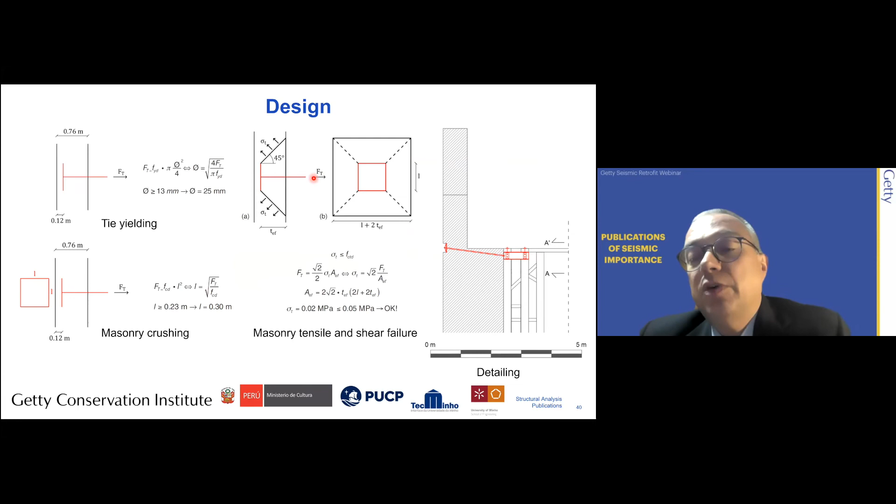Second example which is given is in Ica Cathedral, which again is the same idea. I have this facade. I'm going to connect the facade to the inner timber structure. In this case, the forces are quite high and a steel tie is going to be used. And so I have the Ica facade before strengthening. I have the Ica facade after strengthening. I require a force to stabilize, which has to be transferred to the timber system. And you have full details on the design calculations, for example, for the yielding of the tie, for the crushing of the adobe masonry, or for the cone response of the adobe masonry, with the detailing of the final solution to be implemented.

So in conclusion, I tried to show you very briefly the 3 reports that we made for the Getty SRP project. The reports demonstrate that there is a wealth of information. They are available in 2 languages. And we believe they are helpful to carry out safety assessment and to design strengthening.

The final note is, well, these buildings, we have to ensure that they do not disintegrate, as we see in many earthquakes, and they are properly connected. So thank you very much.